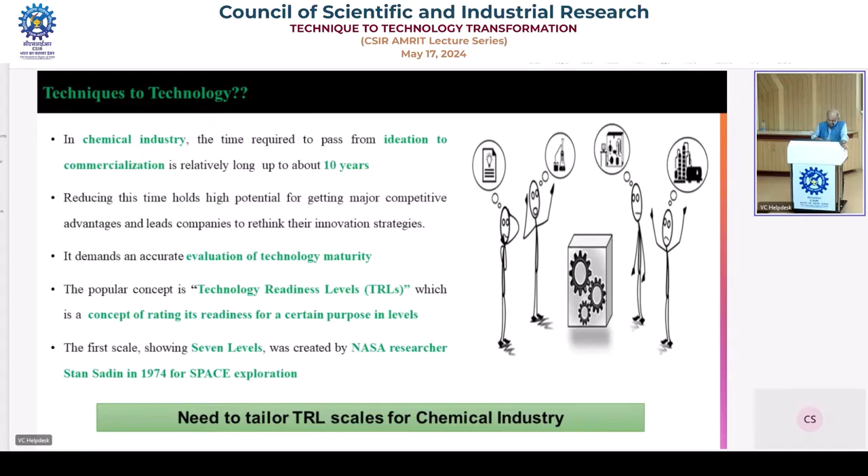So this is where the process synthesis tree occurs. Product identification - how do we identify a product? In the context of CSIR, what tends to happen is the following. Correct me if I am wrong. Scientists are selected based on their scientific capabilities. All brilliant scientists, no doubt about it. They continue to work trying to find out more and more science.

And then somebody like Kalai Selvi comes and tells you, what is the use of this science? Show me where this science can be converted into technology. And then they start searching for a product based on the understanding of their chemistry. Somebody may be an expert in sulfonation, somebody may be in nitration, somebody in alkylation, somebody in esterification. And they tend to work in their area of expertise and try to come up with the product.

And they propose a project, CSIR funds that particular project. But there is no confirmation of the fact that even if they produce that particular product, there will be a market for that particular product. And if there is a market for that particular product, what is the cost at which that particular product is going to be sold? What is the global market?

Who are the other manufacturers? What are the quantities which they are making? What is the cost at which it is available? So on and so forth.

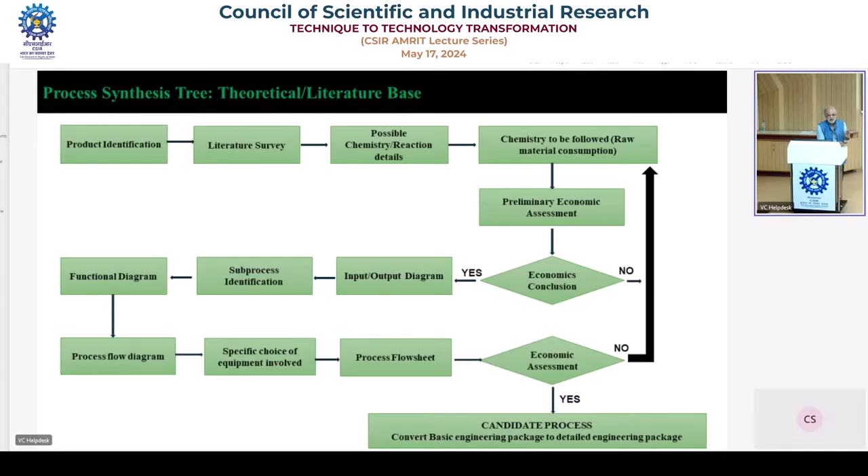This is a very busy slide. Don't bother to read it, but I'm just going to explain in brief what is going to be there. Please tell me the time for this, because I get carried away.

So we have a laboratory. These are the typical tasks which we carry out in the laboratory, in the further characteristic elements: analysis, basic kinetic studies, thermodynamic studies, analysis of thermodynamic properties.

Many times what happens is, you know the chemistry, and you can handle that particular chemistry on a lab scale very easily. But when it comes to the scale-up version, engineering properties which are required, the physicochemical properties of the chemicals needed for engineering design of the equipment, are many times not available.

So you need to study those properties at the operating temperature and pressure conditions, and that is a very expensive proposition. Many software tools are available based on group contribution theory and so on, but you cannot invest one crore of rupees based on calculations done using group contribution theories unless you have two or three real data points confirming that your group contribution method is correct and predicting the properties properly. This is a very expensive proposition.

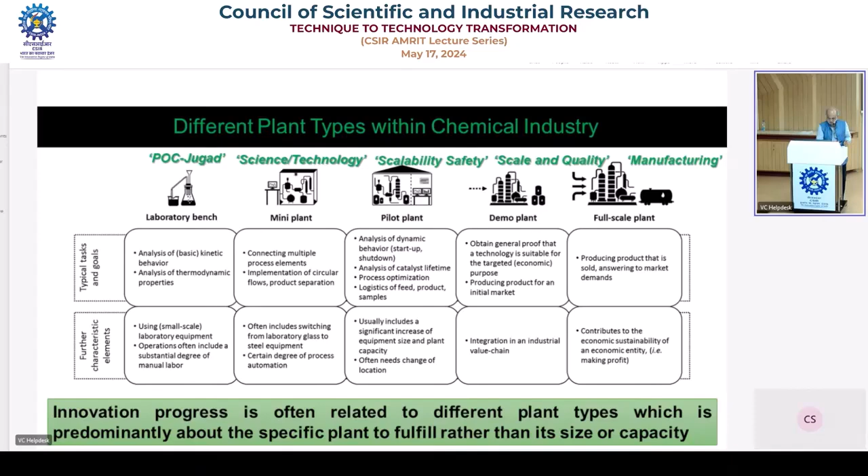So let's move on to our TRL level. Basic research doesn't include the TRL. It's what we call blue sky research, exploratory research.

Many of the scientists selected in the CSIR system have outstanding capabilities in this particular direction. I think they are brilliant. I have absolutely no complaint about their scientific capabilities at all, none whatsoever. Then it comes to applied research.

Now there's a basic question mark there. What tends to happen is scientists usually don't like to be told what to do. This is where the basic problem arises. They feel that they are independent free birds.

That is only true in the case of people like us in academics, where nobody dictates that you must work on this area or that area. I don't want to work—I do my teaching. Don't ask me what I need to work on.

But in a setup like CSIR, you have a responsibility towards both. You're partly academic, partly industry. So you must be in a position to at least compromise your time, partly for basic research and partly for applied research. And I say that even in the case of academics, every academic should spend at least 15-20% of their time identifying socially relevant problems using the same technique, technology, or engineering skills they have learned.

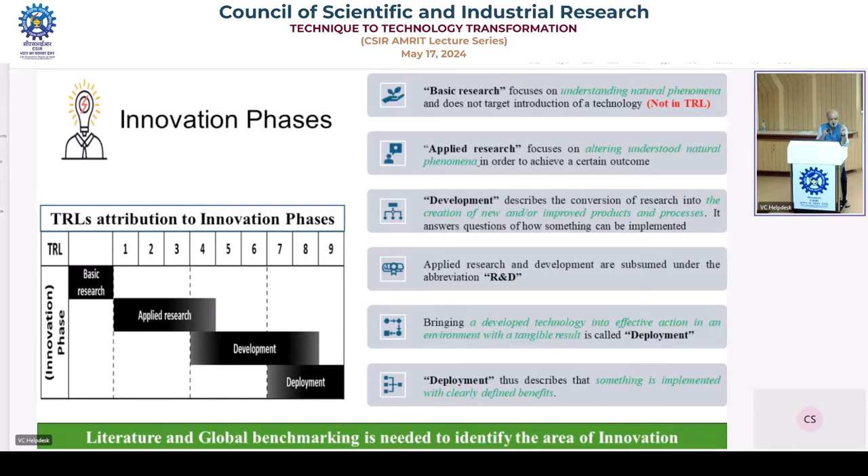And that is where the maturity of the technology in terms of commercial readiness level will come into play. And then that is the deployment. So these are again very busy slides, but this is essentially pointing out to the same facts which were there in the original process synthesis tree or process synthesis framework which I had talked about.

Ideas, opportunities identified - I have already spoken about how the ideas need to be identified based on the market need, based on the requirement of a product. Then the concept: what patents are already available, market survey, the price of the product being sold, the percentage contribution of various elements in that product, what is the raw material cost, utilities cost, labor cost, etc. They need to be added, and you work out the proof of concept based on laboratory research.

So this is what we call a basic engineering package. That basic engineering package you should be in a position to make after you have reached a TRL 3 or TRL 4 level. Only on that basic engineering package research will you be able to market it and sell that particular idea to a prospective industrial environment.

Then we carry out detailed process development where we convert the basic engineering package into a detailed engineering package, which is a very expensive activity, and I'll relate the extent of investments and money required as compared to the TRL level. You've got to demonstrate the full-scale engineering, then commissioning, and finally the production.

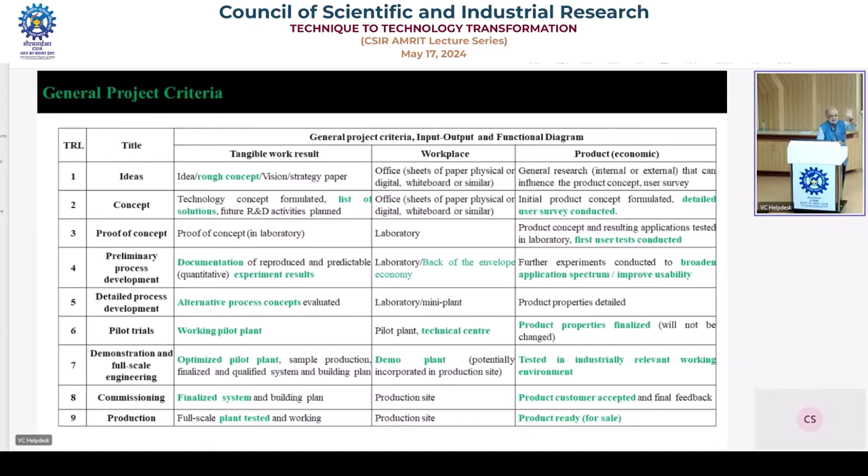Again, these are all details, reaction engineering ideas. Many of these complex synthetic organic chemistry based reactions are very difficult to analyze from a kinetics point of view. Not impossible, but the number of experiments which need to be carried out are very, very difficult.

This is where the new concept of digital twin comes into play. You don't necessarily have to carry out experiments to understand the kinetics. You can use a data-based approach: carry out multiple experiments on a smaller scale with little variations in the parameters, generate a lot of data, and let the AI or ML crunch that data and come up with a model which is statistically significant, scientifically rubbish.

You don't worry about it. Ultimately, what is your objective? Your objective is the system should work at an enhanced scale. These models are likely to work, and they do work, once you are in a position to have a sufficient number of data sets.

And that's why AI/ML is going to rule the world, mainly because you look at any refinery - they have got 50, 60, 70 years of data and don't know what to do with it. Similarly, our government is insisting that every effluent treatment plant, every boiler should have an online monitoring system of emissions, COD, BOD. Who's doing what with that data? I have absolutely no clue. If you use that data, analyze it, and come up with policies based on that data, then people will also feel confident that they are contributing to the data deciding the final policy. So it is important for us to consider that.

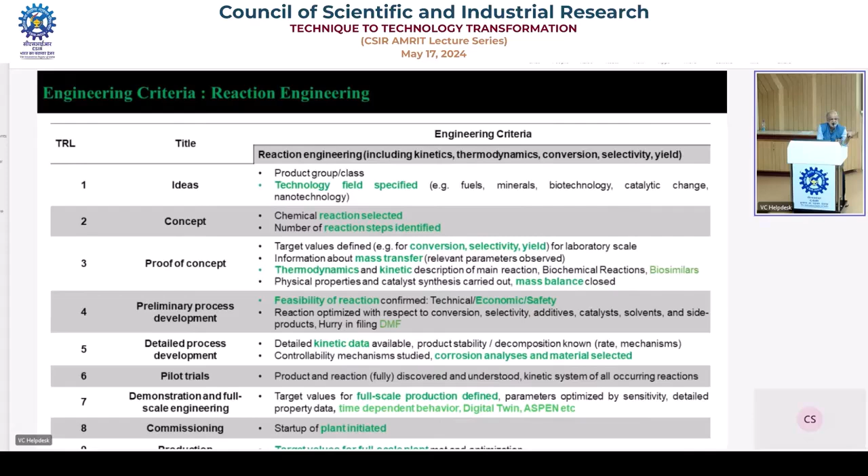So proof of concept, preliminary process development, feasibility of the reaction, kinetic data, pilot trials - these are various stages. How these stages are important in the overall process synthesis tree development, which I talked about. I had only a box and blocks out there. Each of these slides essentially tells me about details of those blocks and what we really need to carry out.

Process system engineering is another important area, mainly because you're integrating multiple activities in the final process plant. It is necessary for us to have processes which account for the interlinkages and interrelationships between the various processes - combining unit operations, whether cost can be reduced by having multiple functions, can I have a filter cum dryer? Can I have a reactive distillation?

A simple reactive distillation column can synthesize esterification based reactions like acetate, butyrate, and so on, as against the 6, 7 columns which used to operate earlier. So such disruptive technologies are available, are being developed. And that's why I said no process is ever mature - processes are likely to get developed continuously.

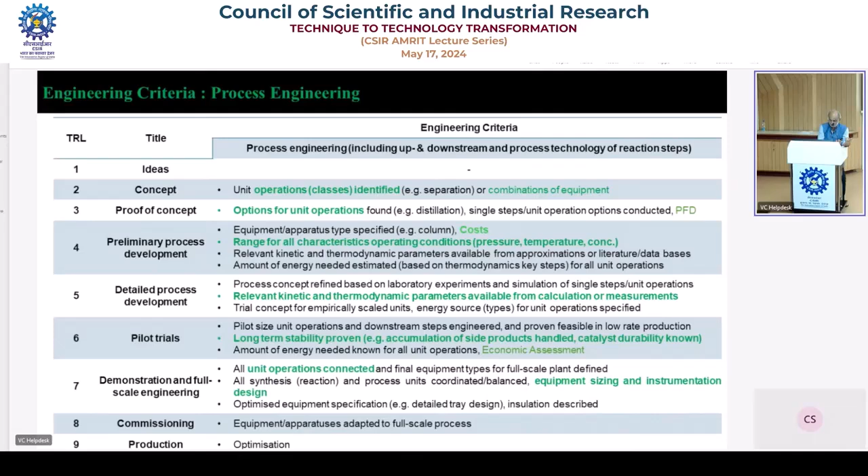So the final flow diagram - concept, preliminary economics, preliminary process development, economics based on sub-processes, detailed process development, process flow diagram, P&ID - where you have Aspen, optimization, ANSYS, CFD simulations available. You can use all these techniques available. It's not necessary for you to actually do the experiments - numerical experiments are equally strong, equally predictable, and equally accepted.

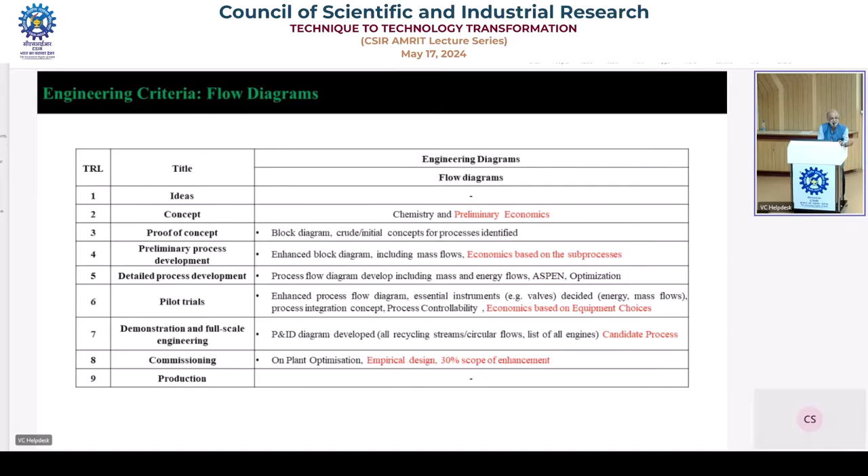Then you have pilot plant trials, enhanced processes, again economics based on the choices of the equipment. Then you have a candidate process. As I said, most of these designs, if empirical in nature, over a period as the technology matures, you would be in a position to get at least 30% enhancement in the productivity of these chemicals.

So these are the typical recommendations made in terms of thinking about commodity chemicals, pseudo-commodity chemicals, fine chemicals, and specialty chemicals - the tons per annum, and at various scales of operation, what are the typical scales at which they need to be carried out so that with confidence you can scale it up to different sizes and get full scale production.

So at proof of concept level, at what scale; preliminary process development, at what scale; detailed process development, pilot, demonstration, commissioning, and product - depending upon the type of chemical which you have identified, whether it fits into a commodity chemical or pseudo commodity chemical, a fine chemical or a specialty chemical. Boundaries are not rigid - the boundaries can go here and there.

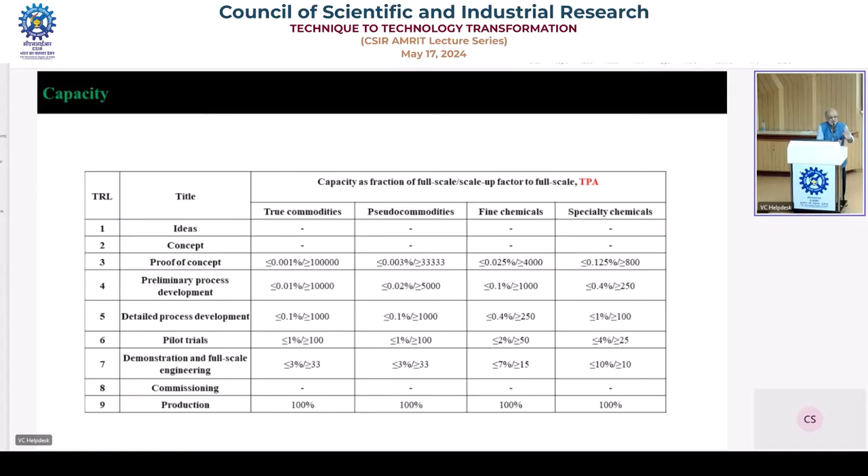And you see the kind of development which happens in the pharmaceutical industry, which is really exploiting this. But pharmaceutical industry has a different model. What do they do? They don't identify new molecules, because identifying a new molecule going through phase 1, phase 2, phase 3 trials is extremely difficult. So what they do is look out for patents which are going to expire after 20 years, identify those patents, look at the processes, tweak the patents so that they can file a drug master file, claim their patents, and the moment the patent comes off the line, they start producing it. But here also, in the hurry of filing a DMF or drug master file, many of these processes are sub-optimized. And then they realize they could have done it much better, but it is too much effort to change the DMF again. By that time, the generic has already gone into the market and is already being sold. So once you start getting money, people sit back - they don't necessarily want to improve.

So these are some of the examples which I have given in terms of TRL. I'm going to skip both these slides, and this material is available to you - you can use it. So in case separation is the idea, then I have distillation, rectification column, tray column, and you look at the TRL levels of each of these.

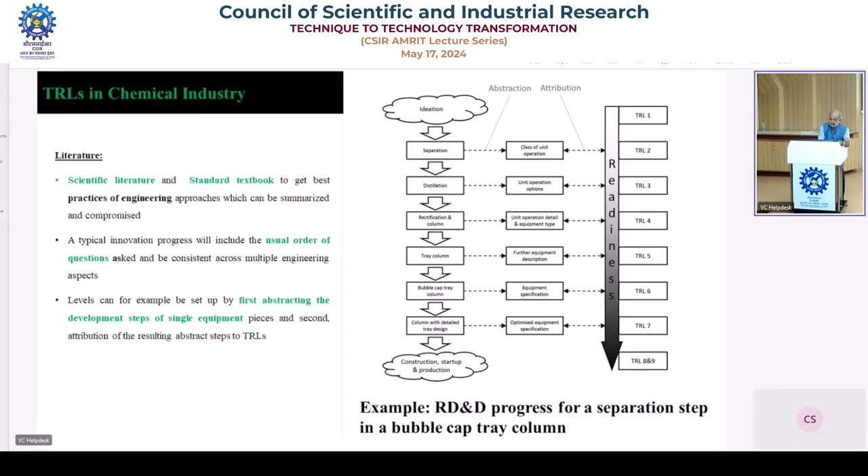What is the knowledge base available to us? What are the theoretical models available to us, on the basis of which we can do a confident design and confident deployment?

If I extend this further and take a case study, you look at the various stages of manufacturing activity, a continuous hydroformylation, and you'll find that different stages are at different TRL levels. But as far as the overall hydroformylation and formation of the product is concerned, it is at only TRL 4, the minimum or lowest TRL level among all the activities present. That's the most important thing to understand.

It's like identifying a rate controlling step in your chemical synthesis process. If it's a 5-step reaction, one of the steps is the slowest step, then that is the step which needs to be worked upon to speed up that particular step.

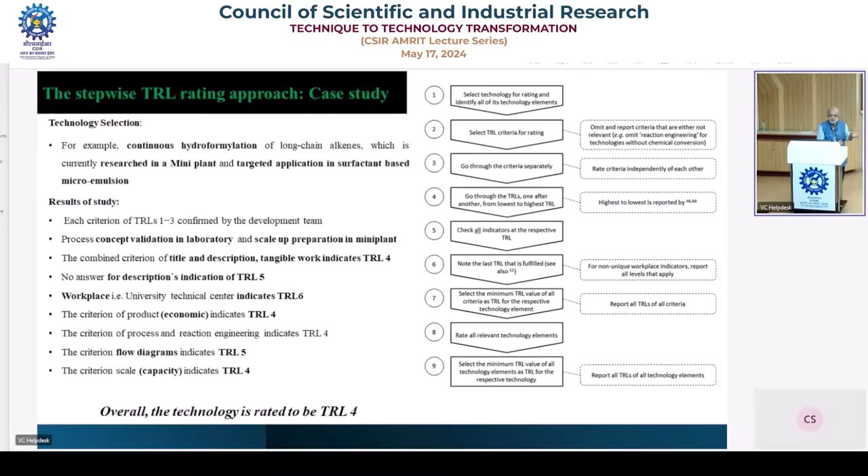So what is CRL? Commercial readiness level assesses the product's commercial maturity on a scale of 1 to 6. TRL was 1 to 9, or 1 to 10. Initially it started with 7, then two scales were added later on.

It starts at CRL 1 when the commercial potential first emerges, meaning it appears that this particular product has commercial value. The commercial readiness level, like TRL, is critical for determining and measuring organizational maturity.

What do you mean by organizational maturity? You have a technique available, you have a technology available, but am I, as an organization, have the capability of exploiting that particular technology? Do I have the marketing skill set? This concept arose as a supplement to TRL because it became clear that technological maturity alone does not ensure the success of products and enterprise.

This is like going to a hospital, talking to the surgeon. The surgeon comes out of the operating theater and says, operation was successful, but the patient died. So essentially, it doesn't serve a purpose.

And I have experienced it myself. I was associated with one of the processes when I was in England, and this process was mycoprotein. Mycoprotein is essentially a protein of vegetable origin, where the substrate is methanol, and the microbes are of fungal type. The fungal density increases, and then essentially you get strips of protein. It's completely vegetarian in nature, because it's a fungi which is being eaten like a mushroom.

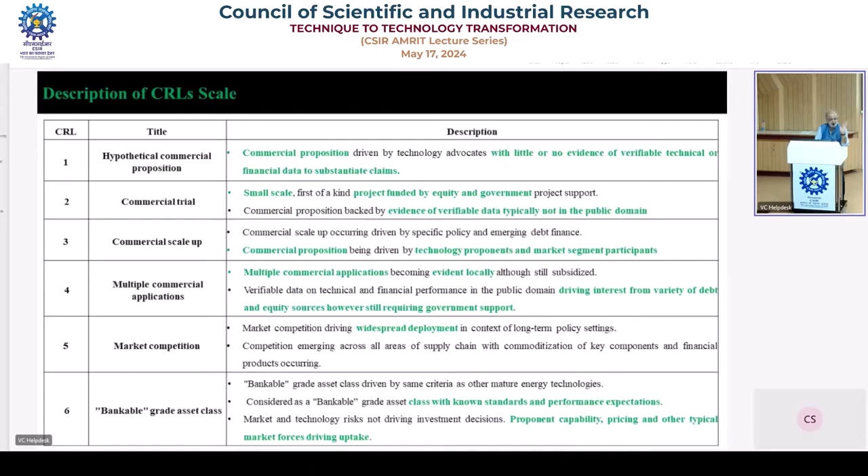So this is where it starts. TRL2, CRL1, technically and commercially untested, unproven. When TRL7, or between 6 and 7, CRL level 2, commercial trials of technology on a small scale.

CRL3, commercial scale up of the technology - meaning what? You're making the same product, the product is meeting the same specifications as on the smaller scale, and the market is accepting your product. Then CRL4, multiple locations which are similar - not only one plant, but 2, 3, 4 plants. And that is what will give confidence to the investor that he or she is not the first investor.

Now, this is a typical question which is always asked by an industry. When you suggest a new innovation to them, the first question which the Indian entrepreneur - I shouldn't say entrepreneur, but industrialist - asks is, 'Pehle kisne kiya hai?' They are afraid to try something new. They don't want to be guinea pigs.

Now, this mentality has to change if Indians are going to get into innovative solutions for making chemicals. But it is up to us to convince them. Kisi ne kiya nahi hoga, but theoretically you look at it - I'm proving it on the basis of paper. Doing these theoretical calculations, you show it to the best scientists in the world.

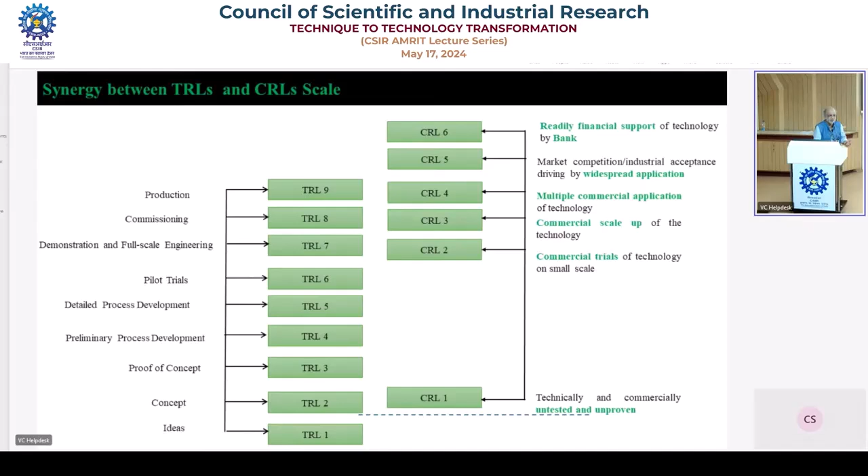So if you combine TRLs and CRL, the synergy gives accelerated time to market. It reduces risk, mitigation, efficient resource allocation - the one I just mentioned is you have limited resources and you're allocating resources which gives you maximum EVA, maximum economic value addition. It also fosters innovation because people will start thinking right from the beginning that they are not just innovating, they are innovating essentially to earn money. Jugaad is fine, but that jugaad needs to be scaled up - it should be translatable and implementable or deployable at multiple locations.

So it becomes now a customer-centric approach rather than a scientist-centric approach, which currently exists in CSIR. It should be a customer-centric approach. And the customers are who? Customer is our nation - a nation is your customer. And whatever are the needs of the customer, you must service the needs of these customers.

So what is the way forward? To further strengthen the discussion about TRLs and CRLs in chemical industry, a lot more work can be done. There are excellent reports and articles available on both these aspects. To encourage application and adaptation of these presented scales, additional criteria and TRL, CRL levels can be arrived at depending upon your own experience. It's like when the original 7-level TRL was being adopted for chemical industry, they found this was not enough - you need additional 2-3 TRLs added, as a result of which they came up to TRL 9, TRL 10.